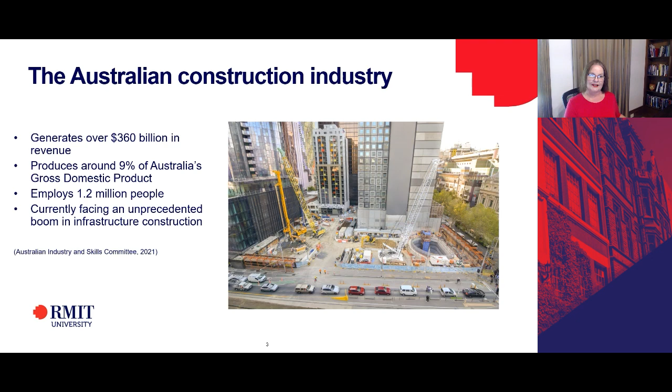The Australian construction industry is economically and socially very significant. It generates over $360 billion in revenue each year and produces 9% of Australia's gross domestic product. It employs 1.2 million people, and currently we're seeing an unprecedented boom in infrastructure construction. The construction industry supply network is complex. It includes manufacturing of materials, equipment and components; services including engineering, design, surveying, consulting and lease management; and traditional construction trades. The ability to deliver the pipeline of projects I just mentioned is dependent on the industry being able to attract new workers and sustain a healthy and productive workforce, which makes work health and safety really important strategically to the industry.

Now, the industry's health and safety performance is relatively poor compared to other sectors. The construction industry accounts for 9% of the workforce, but 12% of work-related fatalities, and about 12,600 workers' compensation claims are accepted from the industry each year, which equates to 35 serious claims every day. More concerningly, according to the Australian Bureau of Statistics work-related injury survey data, the construction industry has four times the all-industries percentage of workers who have not returned to work following their injuries. The construction industry percentage is 12%, compared with 3% for all other industries, which is concerning, because that means potentially up to 1,512 injured construction workers each year may not return to work.

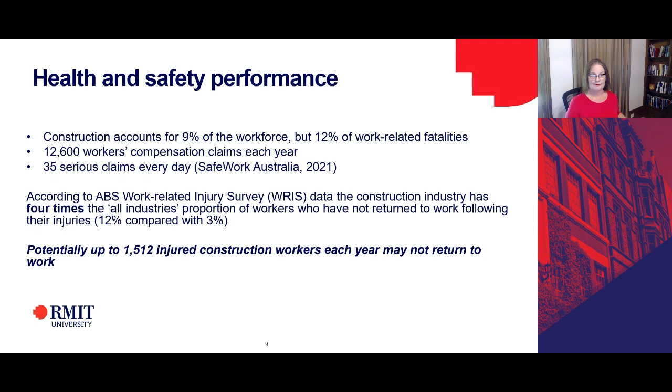A more insidious problem experienced by the industry is the state of mental health within the industry, and it's alarming to read the statistics relating to suicide among construction workers.

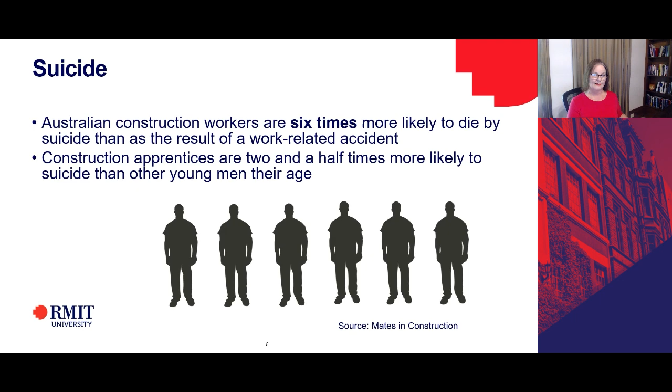If you're an Australian construction worker, you're 6 times more likely to die by suicide than as the result of a work-related accident. And construction apprentices are particularly vulnerable—they're 2.5 times more likely to suicide compared to other young men their age. So we have a serious problem in the industry that is different from the safety problem around workers' mental health, and particularly the high rate of suicide.

Now, the industry characteristics are worth commenting on. The industry is one of the worst performing industries for gender equality—women make up only 11% of the entire construction workforce and only 1% of construction trades-based workers. And work is often physically and psychologically demanding. Hours in the construction industry, particularly in project-based work, are very long. And workers suffer high rates of musculoskeletal injury, particularly manual and non-managerial workers.

You can get a sense of what working in the construction industry can be like looking at this picture on the right, which shows a man doing some shotcreting. Shotcreting is basically holding a hose through which pressurized concrete is being pumped, and he's supporting it over his right shoulder. That puts a lot of strain on his body physically, but the hose, as he has to drag it to move along during this process, actually increases that physical load and burden.

When we looked at this particular task as part of a study that we did, which I'll talk about in more detail later on, we looked at this father and son team who were doing this work, and importantly, the son expected to experience bodily pain like his father felt in his working life, and there was a sort of acceptance that was just part and parcel of doing this job.

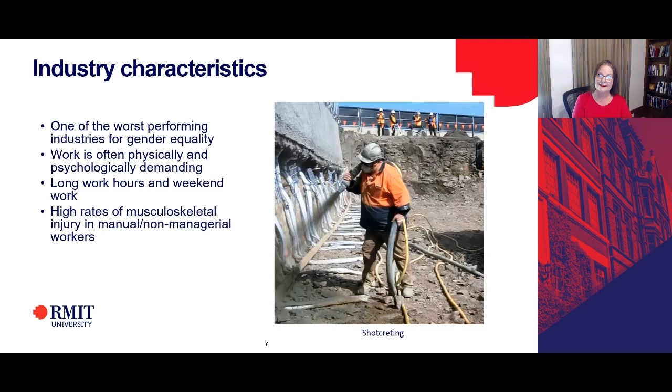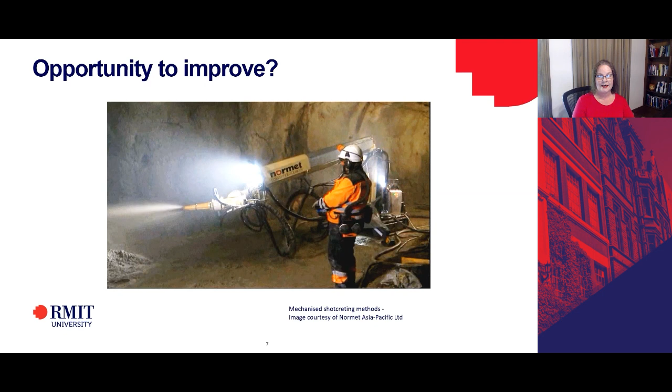So the question is, I guess, is there an opportunity to improve, and is the industry really optimizing those opportunities and seizing them? Here's an example of an alternative method of doing that shotcreting activity, which involves a mechanized approach, and the operator stands and uses a mechanized method of applying that shotcrete. This is used in other industries such as mining, and my question is, is this something that the construction industry should be challenging a little bit more in terms of some of the more traditional ways of working?

So to the supply network and its characteristics: construction is delivered in projects. And projects by their nature are temporary management organisations. So a lot of different groups and people and contributors will come together across the life cycle of a project and work together just for the duration of that project, and then they'll disassemble at the end of the project and move on to the next project.

So people working in these projects are also embedded both in their own parent organisations, and they're also involved in the project-based work. The organisations in the supply network are connected to one another in many different ways, and importantly, organisations can actually be collaborators in one context and competitors in another. So you can see how the supply network complexities can play out.

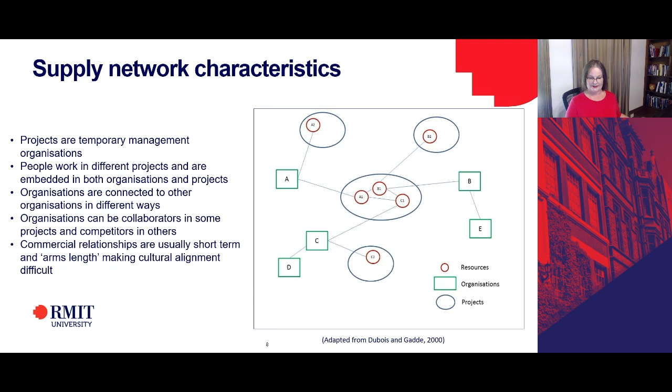The commercial relationships in the delivery of projects are often short-term and arm's length. The industry relies heavily on competitive tendering, and often the lowest price wins, and it involves a multi-tiered subcontracting system as well—work is subcontracted out to other companies to deliver certain components of the project. Within that whole environment, the arm's length nature of those commercial relationships makes achieving cultural alignment very difficult. A number of scholars have written about this, and it applies to many different aspects of project performance, not least health and safety performance, which requires a high level of cultural alignment.

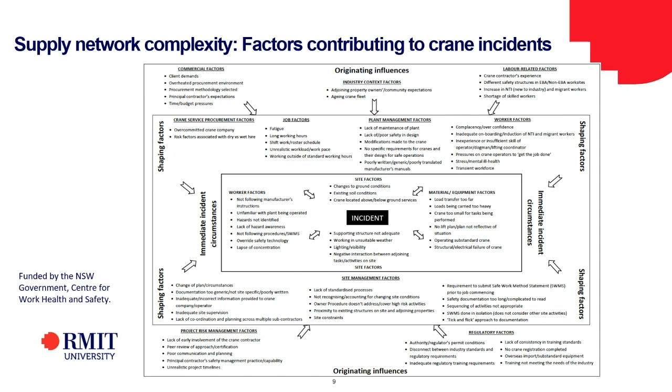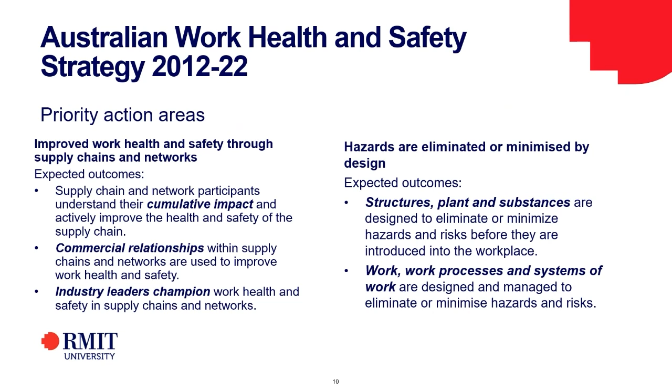So within this supply network complexity and this complex industry structure, we need to be mindful of a lot of things. To give you some policy context, the Australian Work Health and Safety Strategy 2012 to 2022 identifies two priority action areas, both of which I want to touch on today because some of our research deals with both of these areas.

The first of those areas is a priority action area around improving work health and safety through supply chains and networks. Critically important, relevant to what we're talking about today. And importantly, in that particular priority action area, they talk about the cumulative impact of different things that happen within complex supply networks that can create the conditions which give rise to safety and health issues.

And commercial relationships, critically important. It also talks about the need for industry leaders to champion work health and safety in supply networks. And I'd like to acknowledge the work of particularly a number of public sector clients organisations in the construction industry who are really driving a lot of activity around championing and leading change in the projects they procure. I'll talk a little bit more about that as we get into the presentation.

The other priority action area I want to highlight is that hazards should be eliminated or minimised by design. This is the idea that we shouldn't wait for things to emerge on site and become apparent as problems. We should actually look upstream when we're making decisions about the design of structures, the design of plant, the design of substances, and the design of work and work processes and systems to eliminate hazards wherever possible or reduce them by design decisions so that they don't manifest as health and safety problems in the workplace.

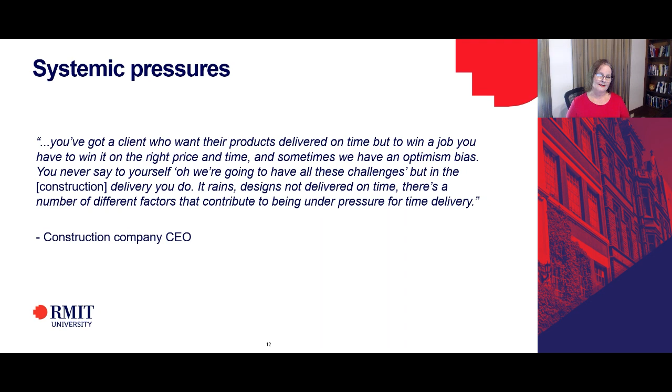Here's a nice quote from a construction company CEO who we interviewed recently in relation to a construction industry culture program that we're working with industry on.

He commented: "You've got a client who wants their projects delivered on time, but to win a job, you've got to win it on the right price and the right time. And sometimes we've got an optimism bias. You never say to yourself, oh, we're going to have these challenges, but in the delivery you do. It rains, designs aren't delivered on time. There's a number of different factors that contribute to being under pressure."

These pressures are systemic pressures that arise because of the way that construction projects have traditionally come together, and the way clients and contractors and others have engaged in a commercial sense. They actually do have health and safety implications down the track.

Moving on to the Construction Industry Culture Task Force work, which is an interesting piece of work that I'm involved with in collaboration with researchers from the University of New South Wales, the Australian National University, and also the University of Tasmania.

What the Construction Industry Culture Task Force is trying to do is actually address the issue of long and inflexible hours of project-based work, trying to rethink working time practices in project-based work with a view to improving health and well-being, giving people time for life so they can actually participate in healthy and fulfilling lives outside of their work activity, and improving gender diversity within the industry.

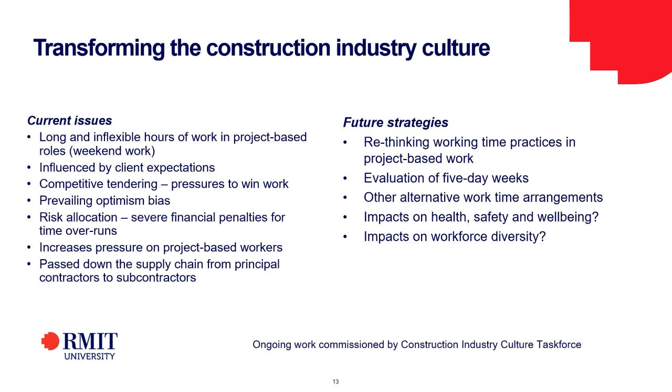We've already talked a little bit about the role that clients are playing, and this work was funded by the Office of the Federal Safety Commissioner, who asked us to identify what clients should do across the life cycle of a construction project to actually drive health and safety improvements. We tried to establish this based on the available research evidence, and specified what we thought clients should in fact do, based on the best available evidence, in the planning stage, in the design and procurement stage, in the construction stage, and in the completion stage of projects.

So it took a life cycle approach, and this particular set of documents was adopted by industry and has been used in the delivery of major infrastructure construction projects here in Victoria. However, it was limited in that it specified health and safety management actions clients can take within their own organisations, but it didn't adequately acknowledge that those management actions take place within the broader context of a commercial relationship and the commercial frameworks through which projects are delivered.

Commercial frameworks can be loosely defined as the strategies and practices that the client uses to establish the commercial relationships they enter into to achieve their ultimate goals and objectives in the construction project. It involves choosing a contracting strategy, establishing what the project objectives will be, often articulated as key result areas, how performance is measured against those objectives, and the financial incentives and mechanisms that will be applied to meeting them.

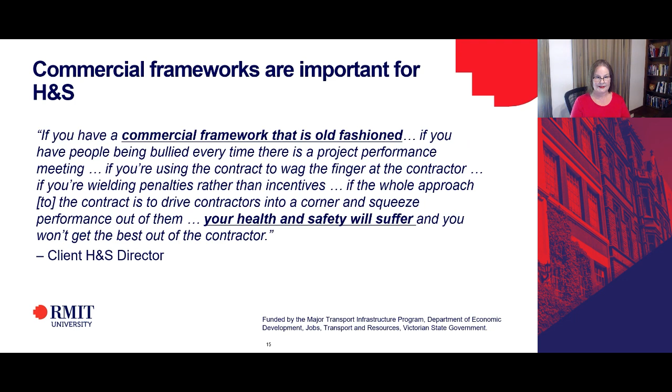I think this was telling, because it was basically saying that some of the old-fashioned ways of doing business are in fact not working so well from a health and safety point of view, and that perhaps a more collaborative and less punitive approach may be warranted.

The research into commercial frameworks that we undertook relatively recently with the Major Transport Infrastructure Programme involved interviews with prominent client and contractor representatives here, but also in the UK and USA, and it established that health and safety requirements are often included in contracts between clients and their delivery partners, and that performance objectives for health and safety are usually established, including some minimum conditions of satisfaction. Historically there was a focus on safety, but now I'm really pleased to say there's much greater emphasis being placed on occupational health, and there are some real leaders in that space, with clients leading the way to drive health improvements in the construction industry.

Typically, performance is measured using a suite of leading and lagging indicators. That terminology is widely used in health and safety, but for those who may not be familiar with it, lagging indicators are things that have already gone wrong - rates of injury, rates of incidents that have actually occurred, negative things that have happened on projects - whereas leading indicators are usually more positive indicators of things that might be being done that may actually contribute to the prevention of incidents or ill health. So the term leading and lagging is an important one, and there's ongoing controversy about how to balance those two sets of different types of indicators and their validity and reliability.

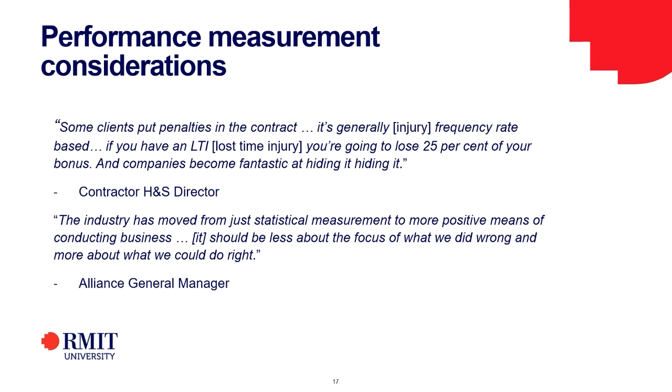Another Alliance general manager told us that the industry's moved from just statistical measures to more positive means of conducting business, and it should be less about the focus of what we did wrong and more about what we could do right. Interestingly, there is a push towards positive performance indicators and leading indicators. However, making sure the leading indicators you're using are valid and reliable is really critical.

Interestingly, in this work, participants distinguished between the viewpoints of financiers of projects and the viewpoints of the delivery authorities who actually manage the operational delivery of the projects. Whereas delivery authorities were seen to be very supportive of positive performance indicators and leading indicators and some of those less tangible things, the perception was that financiers were more focused on counting injuries as what they perceive to be a more objective measure of performance.

So even just that little comment from participants, that there was a difference between financiers and delivery authorities, suggests that clients' organisations themselves are not necessarily aligned in some of the things they're thinking and doing, and that clients must be regarded as complex and heterogeneous organisations in their own right. There may well be different groups - financiers, delivery authorities, end users, operators, and so on - who might have different perspectives on what good practice in managing health and safety looks like.

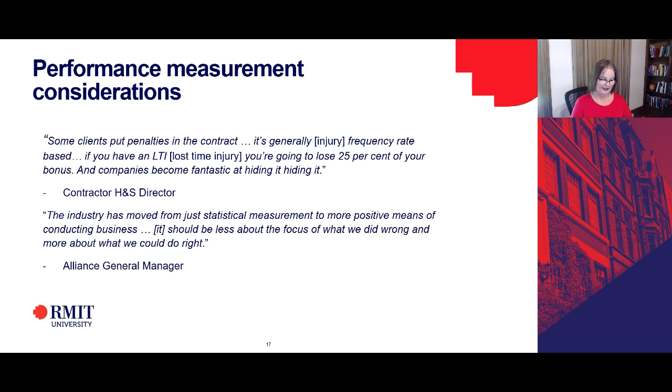More comments on managing health and safety at the client-contractor interface.

Another piece of work we did was a longitudinal case study of a large infrastructure program, where we followed the activities of this program for about 12 months. In this program, the client's organisation was introducing a lot of new measures designed to help contractors understand their health and safety obligations and respond to contractual requirements associated with many different aspects of managing health and safety in their projects.

Interestingly, what we observed initially was some boundary issues, some tension associated with managing health and safety across the client-contractor contractual boundary. There was blurred responsibility and confusion about the extent to which clients should be specifying process requirements for health and safety, because traditionally clients might specify a performance level that must be achieved, but not necessarily go that step further and offer advice or requirements around the processes by which that level of performance should be realised. So there was tension around process requirements and where that blurred the responsibility between the role of the client and the role of the contractor.

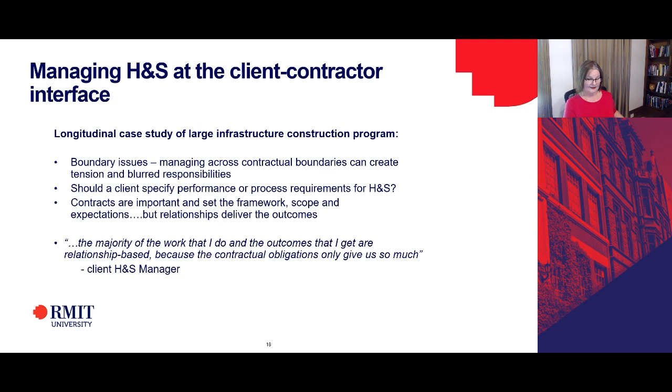Now, moving on to the safety in design part of the agenda, which underpins the Australian Work Health and Safety Strategy - a piece of work we undertook, funded by the National Institute of Occupational Safety and Health in the USA, in partnership with a research team at Virginia Tech, looked at how and when health and safety should be considered in construction projects. We did quite a lot of work to answer that question, because it's quite a complex question.

We interviewed project stakeholders as design decisions were being made, and we sat in design team meetings across projects, observing the interactions between stakeholders. We collected a lot of data about when design decisions were made, by whom, how and why. That data collection took place across 23 construction projects in Australia and the USA, and we undertook 288 detailed interviews to really understand those design processes in all their complexity.

The research examined the relationship between consideration of health and safety early in the project life cycle and the quality of health and safety risk control. Our dependent variable in this study was how well risks were controlled. As I said earlier, the idea is that risks are eliminated or reduced so far as possible by design decision making prior to work commencing.

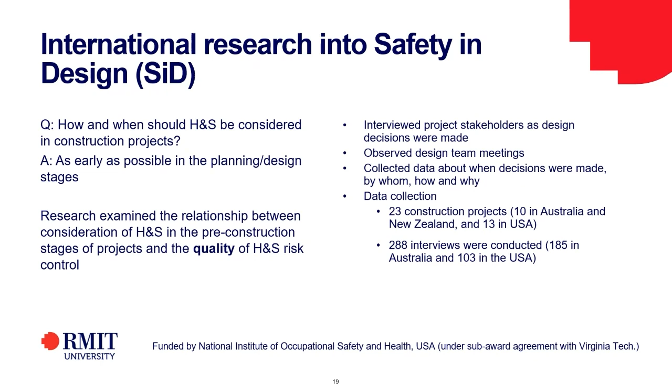Here's an example of some of the results we found. This is just one project, and not even a whole project, just one element of one of the projects we looked at. It shows what's called a sociogram, based on social network analysis, where over the life of a period of decision making, we measured and quantified who was involved in decisions, how involved they were, and how important their involvement was.

The arrows in this diagram show the direction of information flows, and the thickness of the arrows shows how prominent somebody's information exchanges were. What's important from a supply network complexity perspective is that in the top right-hand corner we've got the architect and the client's engineer, and in the top left-hand corner, the constructor's engineer.

Typically we think of design professionals as being architects and engineers, yet central to this decision-making network was in fact the operator. It was a rail project, and the rail operator themselves were really critical in making decisions around design. Indeed the client was very influential, the rail authority and the constructor, and even the precast supplier of precast concrete elements was influential.

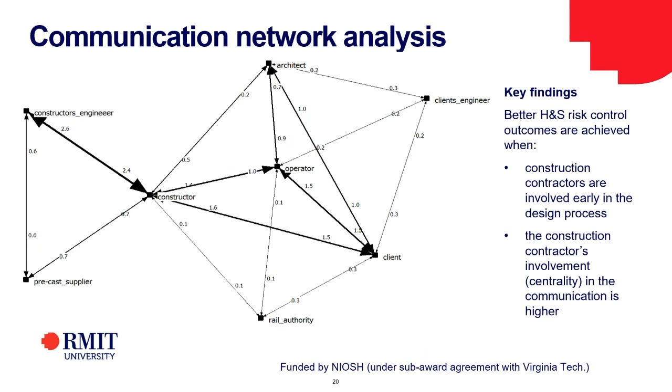The key findings in this piece of work were that better health and safety risk control outcomes—meaning those that did result in eliminating or engineering out health and safety risks—were achieved when two things were present in these networks. Firstly, when construction contractors were involved early in the design process. And secondly, when the construction contractors' involvement or centrality in the communication network was higher, meaning they actually had some influence in decisions being made.

Now, research into reducing musculoskeletal disorders in rail construction work—I'd like to talk a little about this piece of work, again undertaken with support from the Victorian Government Major Transport Infrastructure Programme and WorkSafe Victoria. In partnership with a team from RMIT School of Health and Biomedical Sciences, we used a whole body system of wearable sensors to measure what's going on in someone's body, what their body goes through when engaging in different construction activities.

You'll see here on the left that this particular activity was steel fixing. Steel fixing involves a worker pulling wire off a reel usually attached to their hip, bending the end to form a hook, shaping it around steel reinforcement bars that support concrete structures, and then using a hand tool or a pincer cutter to twist and cut the wire. It's a very repetitive process.

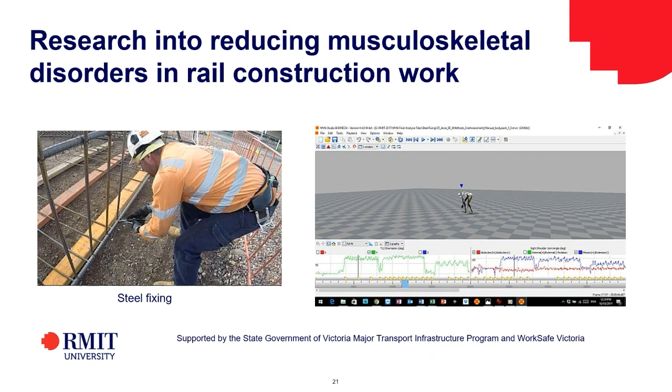In the US, some research shows that workers who do this job make between 400 and 600 of those movements each day. So you can imagine if you're doing that every day, particularly if you're working in a posture like this, it takes a toll on your body.

So we looked at the issues of tool selection and design, and we were able to use wearable sensors to compare the performance of 3 different tools while doing steel fixing in a particular workplace environment. This was all done on site with live construction sites and real construction workers and real construction tasks. It wasn't simulated at all.

We see the man here using conventional pincer cutters and the power tying tool at ground level. He's having to bend over, so his trunk flexion, his back's bent quite dramatically, and that's obviously not a good posture to sustain over a long period of time.

The long handle stapler tool significantly reduced the extent to which he had to bend over. However, it still exceeded WorkSafe Victoria's guidance, which says that working with a trunk inclination greater than 20 degrees for more than 2 hours over a whole shift, or continually for more than 30 minutes, is a risk factor for musculoskeletal injury. So even that long handle stapler tool, though he's bending less, he's still bending in excess of what WorkSafe Victoria would suggest is safe.

The conventional pincer cutter tool was particularly bad in terms of wrist movement because it involved a lot of wrist rotation and wrist flexion and extension in its use, whereas the power tying tool in the middle, which didn't require that twisting and flexion and extension, had almost neutral wrist movement.

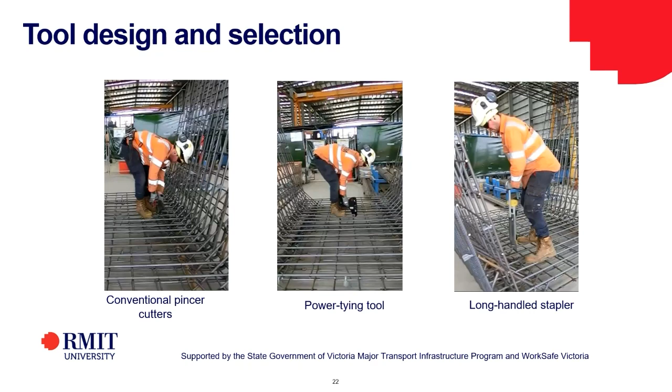So we concluded from this data set that the optimal solution for steel fixing at ground level would involve a long-handled tool, like the long-handled stapler, but with a power tying device attached to it. So rather than a stapler, a long-handled power tying tool.

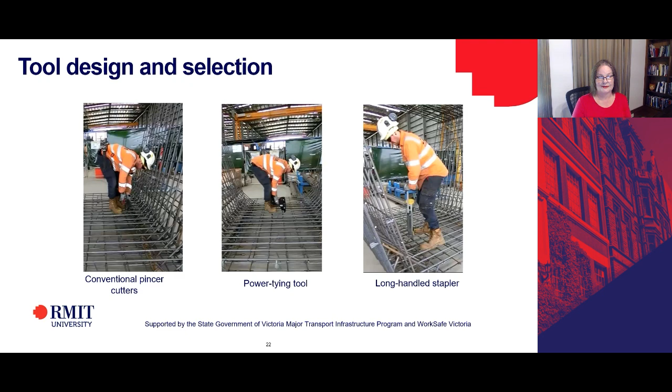Interestingly enough, a manufacturer has actually made such a product and contacted me just last week to ask if we could possibly look at that, and he could do a demonstration for us of that particular tool.

The same piece of work involved looking at jackhammering, and we see here on the left-hand side a man engaged in breaking down the tops of concrete piles to expose the steel reinforcement bars to be able to construct the superstructure on top of those piles.

He's breaking that down using a jackhammer, which is held laterally, sort of horizontally, and it was taking, I believe, between 4 and 5 hours to break down one of these piles, and you can see there are several of them. He's exposed to noise, hand-arm vibration, dust, and musculoskeletal injury risk.

Again, going back to designing healthier, safer work processes, on the right-hand side we see an alternative technology based upon a chemical method, whereby a crack is chemically propagated within the pile at the desired level, desired height, and then the top pile cap can just be lifted off mechanically using a crane or some other lifting device.

So we see that the alternative technology on the right hand side is safer, healthier, does produce better quality outcomes because there's less likelihood of damage of the steel, increased production efficiency, and it eliminates the need for jackhammering.

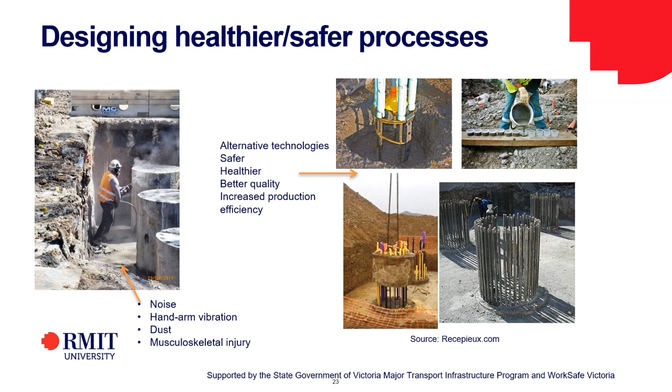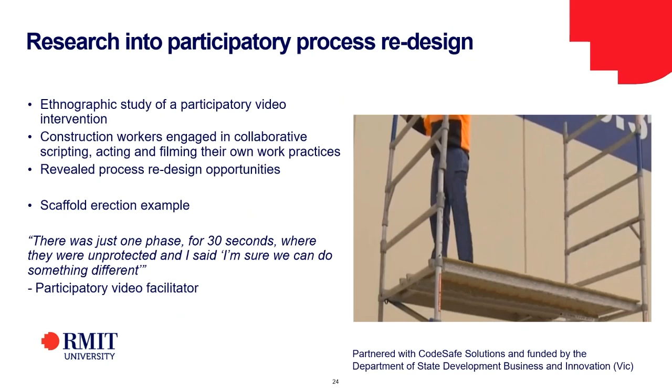Another piece of work that we did, which again involves talking about participation in process redesign, involved an ethnographic study of a participatory video intervention. This work was really interesting because it involved construction workers being engaged through a facilitator in collaboratively scripting, acting, and filming their own work practices, and then using that process to evaluate their ways of working and possibly redesign ways of working.

This is an example of a scaffold erection process, a mobile tower scaffold, where you can see from the photo on the right that the man is actually erecting the scaffold, and in fact he's exposed to the risk of falling because there's no edge protection.

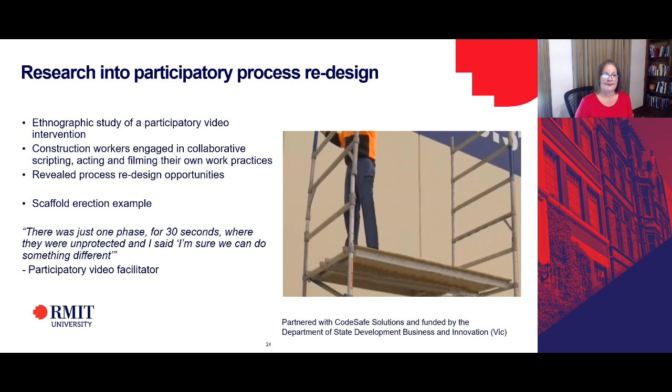So the participatory video facilitator commented there was just one phase, for just 30 seconds, where they were unprotected, and I said I'm sure we can do something different. So the way they went about it was they got the workers to go back to the site, and they got them to rethink the way they erected the scaffold.

The solution they came up with was to use mid-platforms and horizontal members to provide edge protection, so people had edge protection throughout the entire erection process. The site manager was impressed and said the previous way of building the scaffold had been custom and practice for decades. No one had thought twice about it, but once you saw it on the screen, it didn't look quite right. We got the guys who'd been doing it for years to try and find a way to fix it, and in the end, they did.

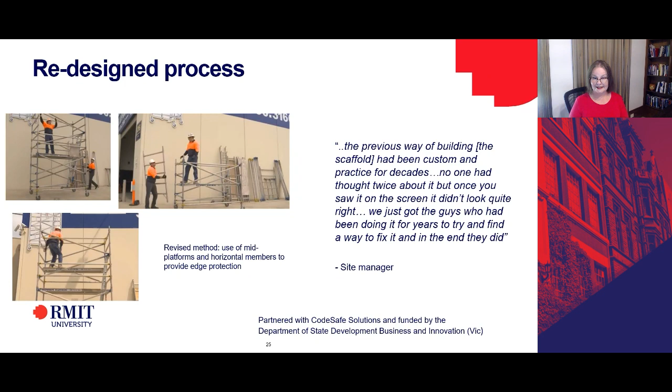I guess the story here is that it was actually the visualization of the process. These people had been doing this job for a very long time, and the way of working had become second nature. But when they stood back and looked at the video of themselves doing it, it allowed workers and their managers to see things from a different perspective and better understand the dangers that they had previously not really recognized.

Now, I can't really not talk about COVID, because in the past year we've experienced an extraordinary time with the COVID pandemic, and this has forced organisations to rethink the way they work, including construction organisations, and in some instances work has been radically transformed. One area in which that work has been radically transformed is in the opportunity for some project-based construction workers to work from home, which would have probably been unheard of prior to COVID, but became an actual necessity due to physical distancing requirements in order to keep work sites up and running during the pandemic.

What's been interesting here was it actually afforded us the opportunity to do some data collection to look at what was happening when workers were working from home. We were given the opportunity to collect data for 8 weeks from project-based workers who were working alternate weeks, so 1 week in the office and 1 week at home.

We looked at their mental well-being, we looked at how they were experiencing work and what was going on during that time. Unsurprisingly, their mental well-being was in fact predicted by things that we know are related to mental well-being: physical activity, satisfaction with work-life balance, sleep quality, and engagement in work. We know those things are all good for health and mental well-being.